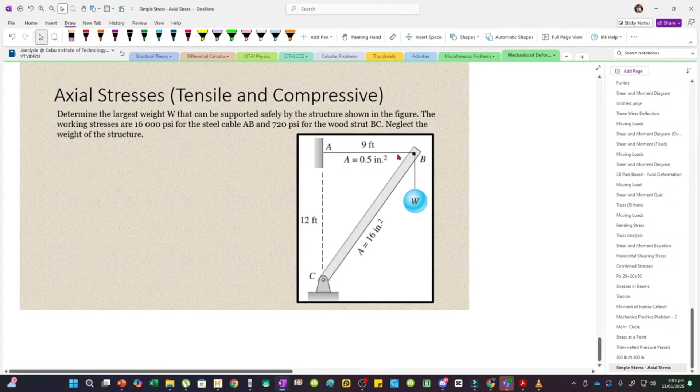Determine the largest weight W that can be supported safely by the structure if the working stresses are 16,000 for the steel cable, ito, and then 720 PSI for the wood strut. Ito yung wood strut. Ayan.

So, neglect the weight of the structure para maging 2-force member yung BC. Itong member BC, 2-force member lang yan. Kasi meron kang force dyan, meron din dito.

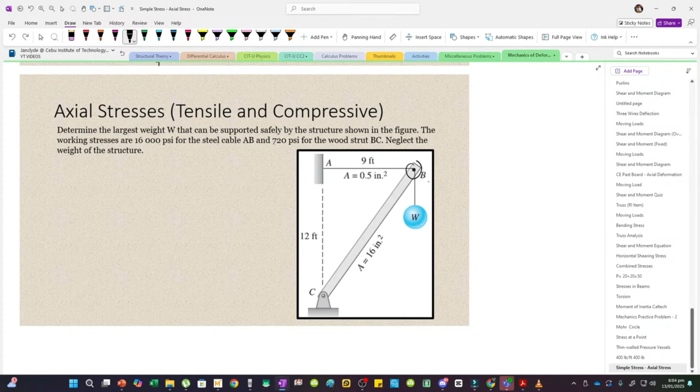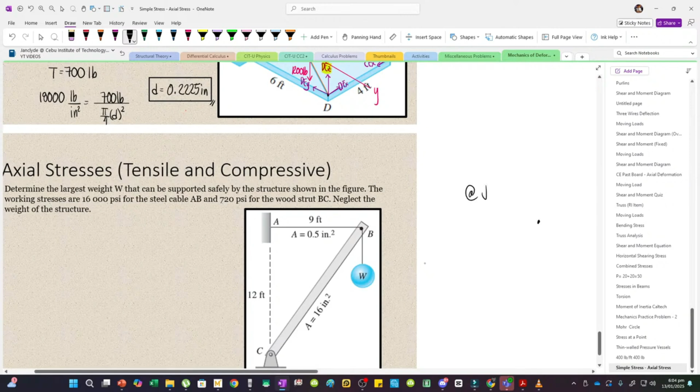So, yung FBD natin, we can just consider this joint, yung joint B. So, at joint B, bale yung force ng BC, yan din yung reaction ng hinge, essentially. So, ito yung BC, and then ito naman yung AB, tension yan kasi cable. So, again, away from the joint. And then, meron din tayong W.

Ayan. Now, this is 12. Ito naman 9. Now, naka-ratio yan. Divide mo by 3. Divide this by 3, magiging 3. Divide mo yan by 3, magiging 4. So, yung legs naka 3, 4. So, this is a 3, 4, 5 triangle. So, yung inclination ng BC, equal lang yan.

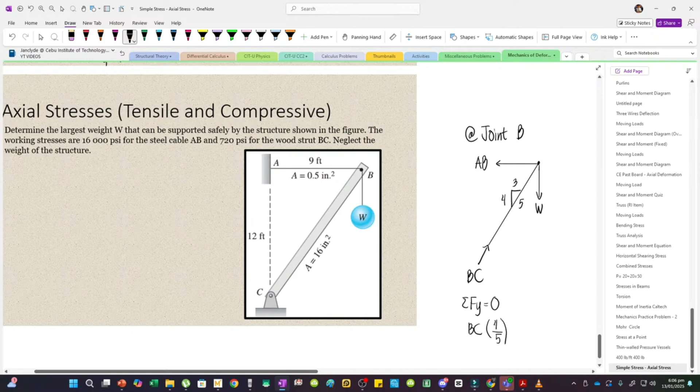Equal lang dito. So, now, we can sum up forces along Y equal to 0. We would have BC times 4, vertical component, divided by the hypotenuse na 5, and then minus W. Equate natin yan to 0.

And then for our second equation, we can sum up forces along X. So, meron tayong AB to the left, negative, and then BC going to the right. So, plus BC times 3, horizontal component, divided by the hypotenuse na 5. Ayan. So, equate to 0.

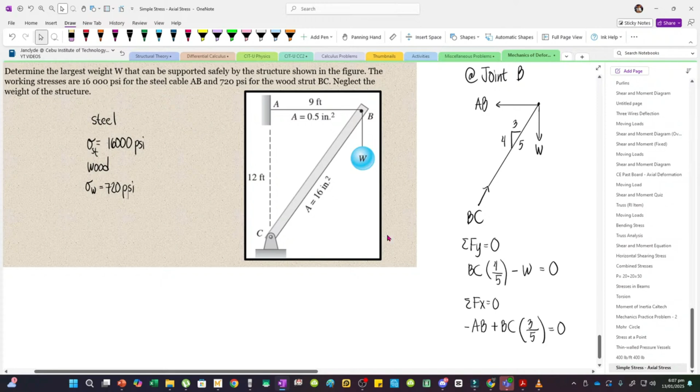So, merong dalawang binigay. Para sa steel, the stress is 16,000. Working stress yan. And then for the wood naman, 720. Simplify muna pala natin to. BC would become, move yung W sa kabilang side, W times reciprocal of 4 over 5, 5 over 4. And then, using this value para sa second equation,

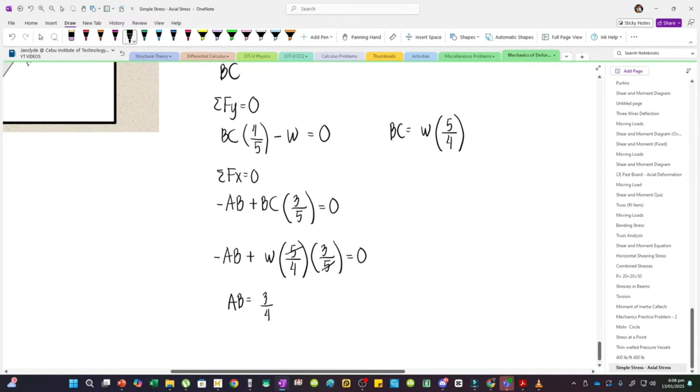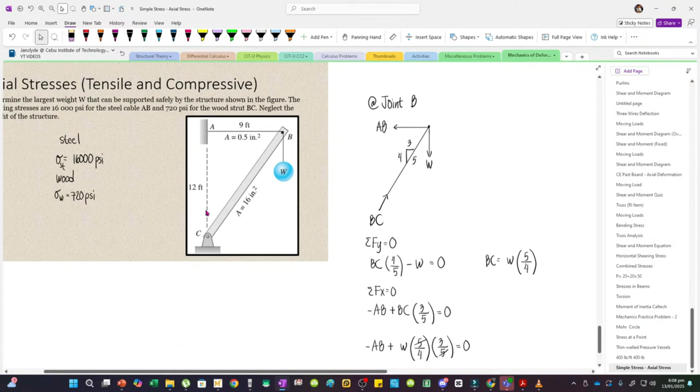yung AB natin, magiging cancel yung 5, so 3 over 4 na lang. AB equals 3/4 of W. Ayan, so ito yung i-carry ng steel, ito naman yung para sa wood. Yung steel lang muna pala, ito kasi yung nasa itaas, member AB. So again, 3/4 W.

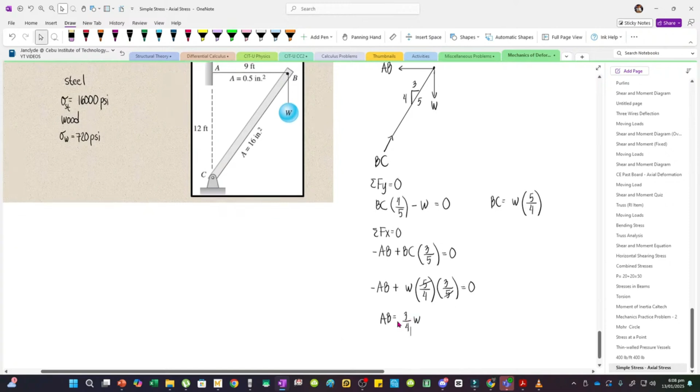16,000 equals 3/4 of W divided by the area. Area is 0.5. Hindi yan diameter, naka-inches squared na yan, so automatic na. So, 16,000 equals 3/4 W divided by 0.5. So, magiging 10,666.67 yan, naka-pounds.

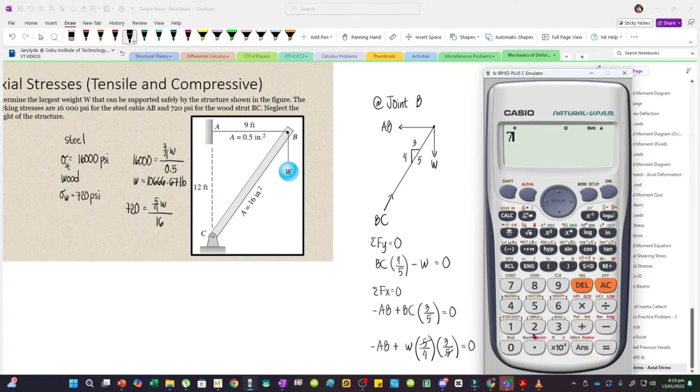And then, para sa wood, 720 PSI. Yung dadalhin niya is 5/4 of W. So, 5/4 W divided by area ng wood, 16. So, 720 times 16 multiplied by reciprocal of 5 over 4, 4 over 5. So, 9216, naka-pounds.

So, alin yung pipiliin natin? Ito yung kaya ng steel, ito naman yung kaya ng wood. Mas maliit yung kaya ng wood, so siya yung magagovern. Therefore, our answer is 9216 pounds. Yan yung maximum W na masusupport ng structure natin.